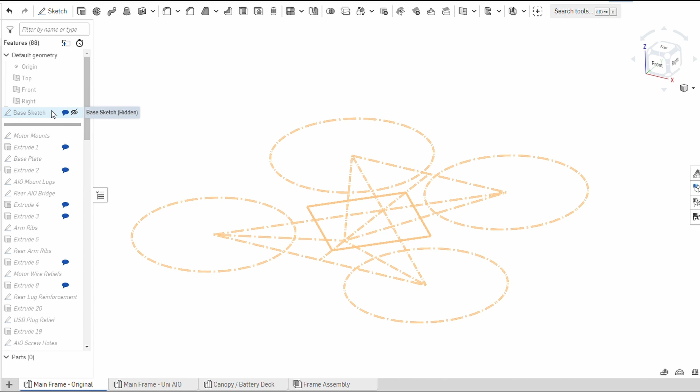I've gone ahead and rolled back to the initial sketch here, and we can see that I started out with the dimensions I knew I wanted, which was for the diagonal center to center distance to be as close to 75mm as possible, and for the frame to have that Deadcat configuration with the front arms more stretched out and the rear arms tucked in a little closer to each other. Essentially that's all the science that went into this design.

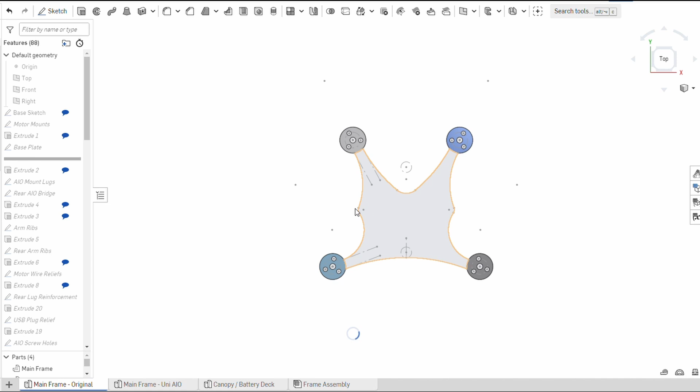From there I extruded motor mounts and the subsequent base plate of the frame itself. Then I added a rear bridge here and mount lugs for the AIO to attach to. Next I added ribs for structural integrity since this will be 3D printed plastic, and I added some reliefs to the main frame to give the motor wires and plug some breathing room.

Then I modified the rear lug here of the AIO to make sure there would be room to plug a cable into it. And I also made counterbores in the arms so the motor clips don't bind up against the frame.

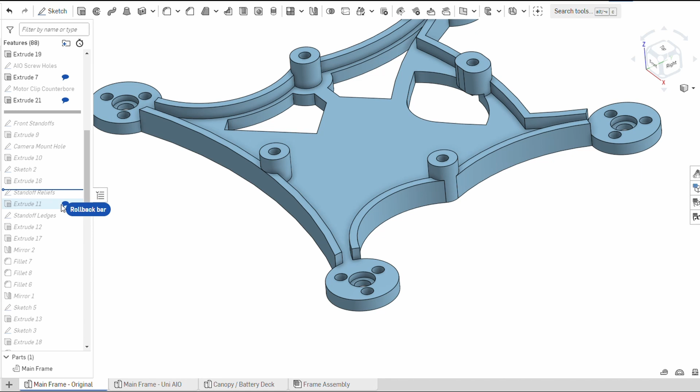From there, I started shaping a set of camera standoffs, and then I added reinforcement ribs and canopy mount holes to that, and went ahead and blended those standoffs into the front leading edge of the frame.

Next, I shaved some thickness off the deck of the frame to reduce some weight, and slapped a copious amount of fillets and chamfers on there to clean up the inside corners and edges.

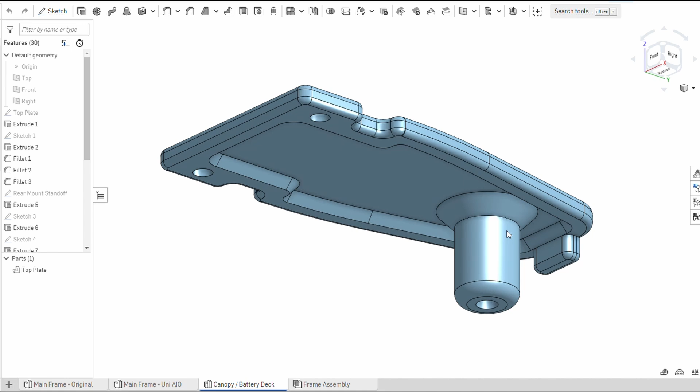Then of course I made an accompanying canopy that would mount to the front standoffs here and bolt through the rear AIO mount. It also has slots at the front and a tab at the back to capture rubber bands for the battery, and I also removed some material from underneath just for additional weight reduction.

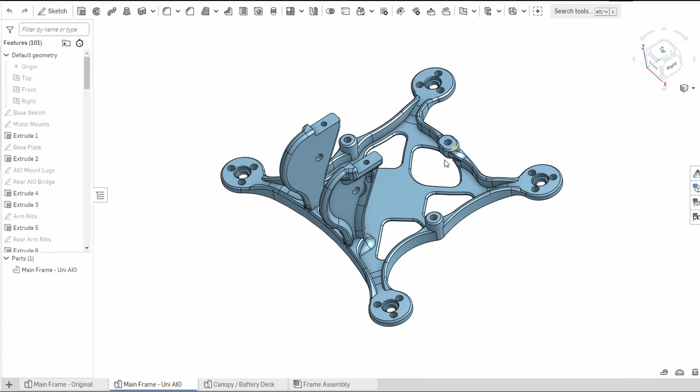This process took a few design and print iterations to get the frame that I flew, but even after that I went ahead and modified the frame further just to accommodate all 25x25 AIOs and not just the Beta FPV Cross AIO that I had picked up for this particular build.

Now here we can see the assembled frame and canopy, and if you're starting to wonder what electronics I have in mind for this build, I picked up this used quad specifically to swap its electronics into my frame.

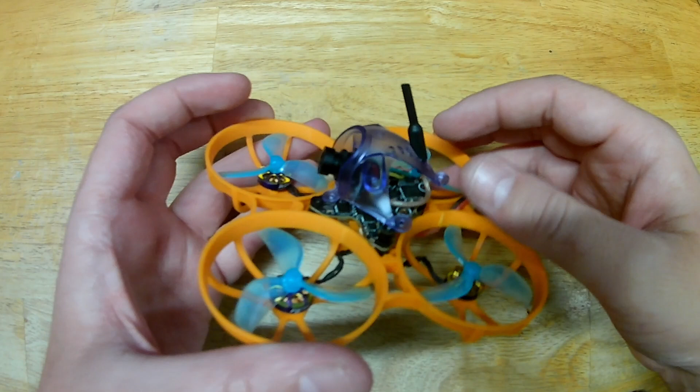And for those part info junkies out there, those components consisted of a Beta FPV 1S ELRS AIO, a Happy Model OVX303 VTX, a Caddx Ant Nano camera, and a very cool looking set of Flywoo Robo 1002 23,500 kV motors.

I was really excited to check these motors out because they're some of the highest KV 1002s that I could find, and they have a 1.5mm shaft. For what it's worth, I opted to run the GemFan 1610 bi-blade props.

Now, as I mentioned earlier, I printed a couple iterations to tweak the locations and fitments of various components, and then it was off to the backyard to test a few battery packs.

Fortunately, I thought it flew pretty well for an early iteration, and it was fun to get used to. Without ducts, it's a little more drifty, so more dramatic banking was necessary to make it around turns, but it also tosses better, which is what I was hoping would open up opportunities to develop other skill sets. Anyhow, about 20 packs in, the frame definitely was starting to show some decent signs of wear.

I had been through a few good tumbles, including a couple hard hits, and the front arms had required bending back straight a couple times at that point, and were showing stress cracks where they meet the frame. Regardless, the frame was holding together, so I was still flying it.

Unfortunately, in an unrelated issue, a few 6-packs of batteries later, the video transmission would just intermittently drop out, and I wasn't quite sure if it was the VTX or the flight controller or what was going on. It just wasn't the biggest priority at that time, so it sat for a couple weeks.

Then when I was packing up for an out-of-town trip and throwing my other whoops in a bag, I decided to bring it along and tempt fate. As one might expect, on a nice cool late evening after a long day on the road, whilst just trying to get some stick time in, quite predictably the inevitable occurred, and I lost video.

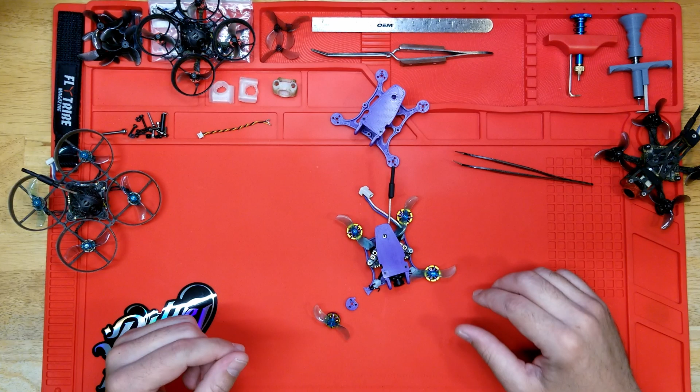So here we are, and obviously I assumed at some point an arm was going to break, but for whatever reason I didn't really think about what exactly was going to happen with the motor. Not surprisingly, it just ripped the motor wires right off.

But perhaps it's not a total loss. I did end up picking away at this rubber coating on the back of this board here, and I discovered these little pads that appear to still be intact, so I may be able to just solder some wires back on there and recover this guy.

Regardless, in the grand scheme of things, if it doesn't work out, it was a $13 lesson, and I've already got a spare sitting in a box ready to rock and roll.

On top of that, it still does have the pending video transmission issue to deal with, and obviously the electronics are going to need to be swapped over into another frame, but I already know that's not going to be another printer frame. This stuff is actually going to be going into a Flywoo TC16 carbon fiber frame, which also is another Deadcat frame, just to keep that variety in the fleet.

Which brings me to my general takeaway regarding 3D printer frames. I think this was a super fun project, but ultimately that's all I think these are when it comes to 3D printer frames. Clearly the strength to weight ratio on 3D printed plastic is not going to be on par with carbon fiber, and while I admit it flew and held up much better than I initially anticipated, the small footprint of this design made it one of the better case scenarios for 3D printing to be successful.

I can only assume that on a larger scale build like a 5-inch, a 3D printed frame is going to be significantly less durable. So for the cost of losing motors and other components, and the added inconvenience of having to replace a frame so frequently, I just feel that 3D printed frames are kind of less than ideal. All that aside, like I said, I did have a lot of fun with this project.